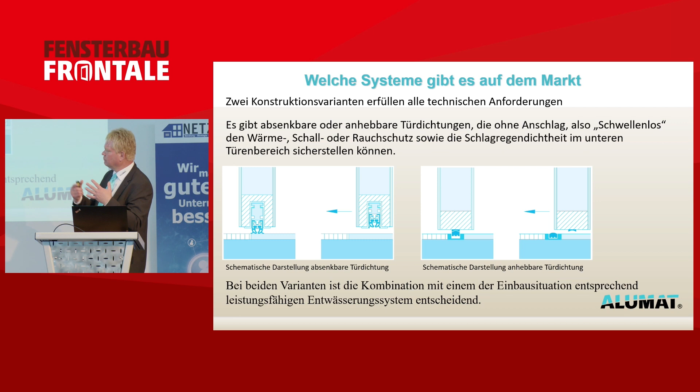So, accessible solutions: there are only two systems that are available here on the market. They differ slightly in their construction. We have the lowerable or liftable door seal. So they can ensure zero threshold, and they can at the same time ensure thermal, sound or smoke protection, as well as driving rain tightness. On the left-hand side, you can see the lowerable version. So this means a building element that is inserted into the door wing, and when the door is closed via a spring and push mechanism or pressure mechanism, it is pushed downward. So the door is opened, the sealing drives upward, the door is locked, the sealing via mechanical forces is pushed downward.

Or on the right-hand side, you have the liftable door seal. So those are magnetic seals, which work in principle like this. You have a magnet in the floor rail, and it has a corresponding counterpart, which you can see on the right-hand side. So if they are meeting in a parallel line, then they're drawn towards each other by magnetic forces, and this is how we seal off this air gap.

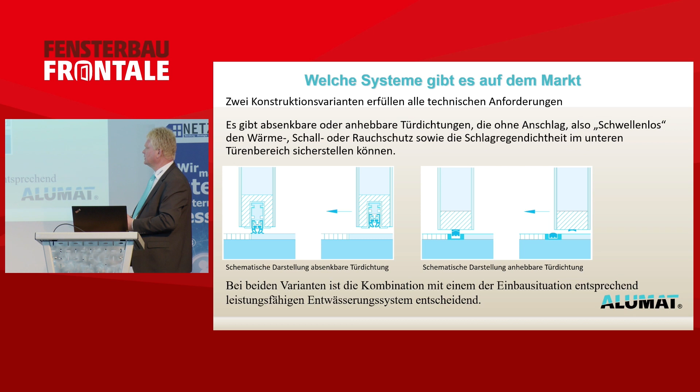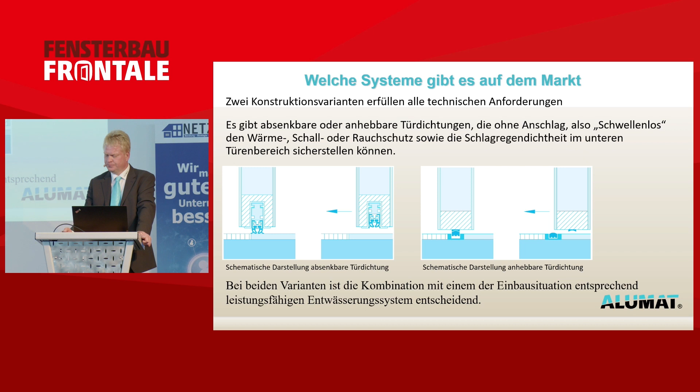With both versions, the combination of a high performance drainage system appropriate to the installation situation is necessary and should at least be investigated, because the sealing in and of itself in the long run will not guarantee success. So you always need to check for potential sources of water which ultimately are damaging, and how you can make sure that you have a watertight solution in general.

So how do we solve this with our solution? So in our floor rail, oh, I'm sorry, I pushed the wrong button. Here you can see it.

So you can see the working of the magnetic double sealing. So in the floor construction on the left-hand side, you have two magnetic strips installed, or magnetic profiles, which is why it's called magnetic double sealing. They are just loosely placed into the floor rail. So these magnets are activated when the door is closed. So the corresponding counterparts can be better seen on the right-hand side.

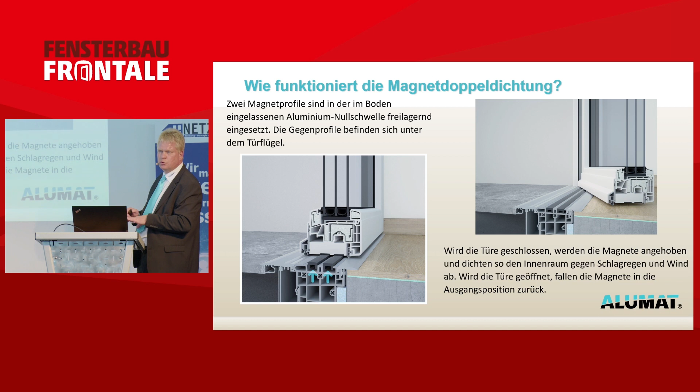So with every door at the bottom, you have magnetic strips that work as the counterpart to the magnet installed in the floor rail. And when the door is closed, as I already said, if both magnetic strips are in a parallel position, they are pulled towards each other upward. And this is how we seal off this system. So when we're opening the doors, relatively easy, the magnetic strips are moving back into the original position, and this once again gives us the accessible and barrier-free transition.

So level transition in construction can be realized via different solutions. For example, MFAT PH. So this is the German abbreviation for magnetic solution for the outer door, and PH stands for passive house certification. We will talk about that in a minute.

So the system is compatible with all wood aluminum systems, with all plastic profiles available on the market, with all aluminum door systems, and also with most of the steel door manufacturers and profiles. Sometimes we have the difficulty with a certain construction depth, so that we can actually insert the magnetic strip in the wing, because steel constructions keep it very lean, but usually in what is commercially available on the market, our solution works.

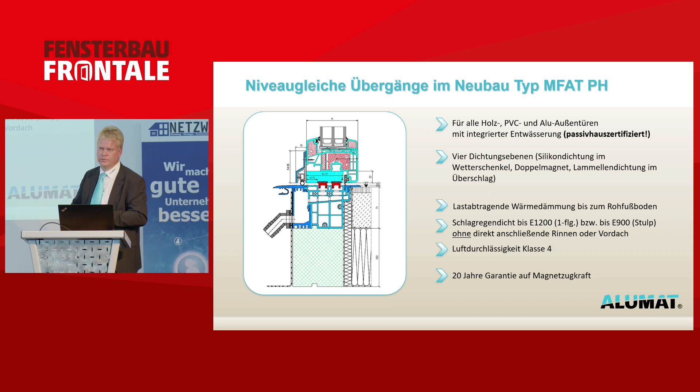So what are the individual parts? How is this realized? So as I already said, for the tightness against driving rain, we have the first construction characteristic on the outer side, which is the weather strip composed of several individual parts. I have the fundamental profile or ground profile, which is attached to the outer side of the door. Then we have the breathing seal, and then we have the cover for the blind, for clamping screws and the like. So this gives us the first hurdle of the rainwater.

So if the door is exposed to weather conditions, the water runs down the door, then it is transported outwardly via the weather strip. If you have a certain wind pressure, air pressure, then it can happen that in the folding area, the water is pushed via the wind pressure towards the inside. So this is where it then reaches the double magnet. So the magnets of themselves, they're just a sealed surface. If they pull together, nothing can get through.

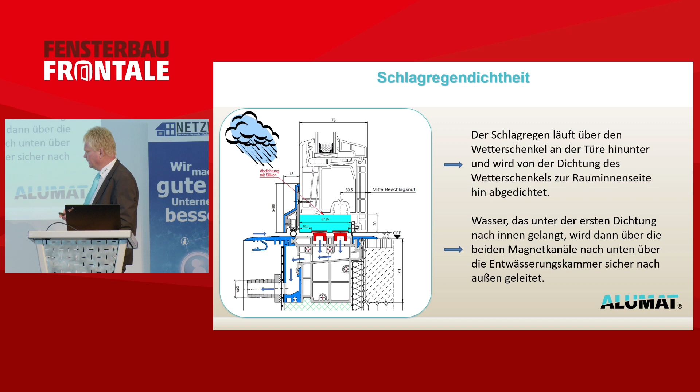But of course, there are some construction requirements. So things where you have ground contact, soil contact, you need to treat that differently than roof surfaces or balconies, of course. So you always have to assess on an individual basis, where do you have weather exposure, where can this water be directed to.

So what does this mean? This zero threshold solution that we offer, that has been on the market for quite some time, has proven itself, or stood the test of time, when it comes to water tightness. This water tightness is not simply a claim that we make, it is also certified by independent certification institutes. And here we have an example.

So we have a 2-wing door in connection with a DK plastic profile. We achieve best results here. So all the way to the class E900, we obtained certification. So we have different profile systems for wood, for plastic, for aluminum, for inner openings, for outer openings. So you have various certification documents that are all available on the website in a four-page leaflet. So there you get all the relevant information.

So it's not only about water tightness against driving rain, but all the other things that I will mention in a minute when it comes to sound, when it comes to protection against B&E, when it comes to other criteria. So now we're moving on to the heat transfer coefficient, always an issue when it comes to accessible doors. There you always have this problematic case of

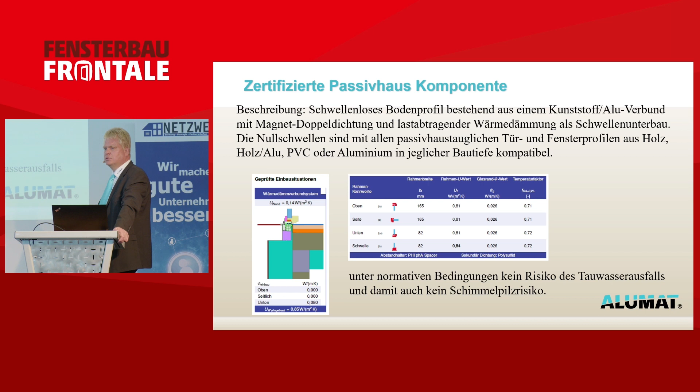So what does this mean? The contractor or the client must be informed prior to execution, and there is an obligation to inform and clarify. So with our threshold system, things are a little bit different. We in our F&E, again, luckily are one step ahead, so we did our homework here. So we have a passive house component, certified in that sense. So we have the first passive house certified zero threshold on the market worldwide.

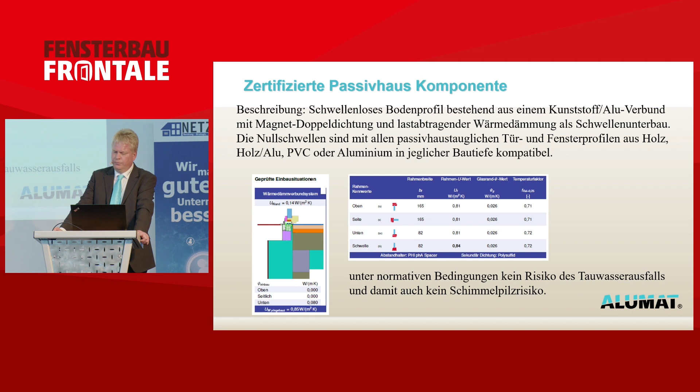So this means that our threshold-free floor profile consisting of a plastic aluminum composite with magnetic double seal and a load-bearing thermal insulation is realized as a threshold substructure. So the zero thresholds are compatible with all passive house compatible door and window profiles made of wood, aluminum, PVC, and the like. I already said that.

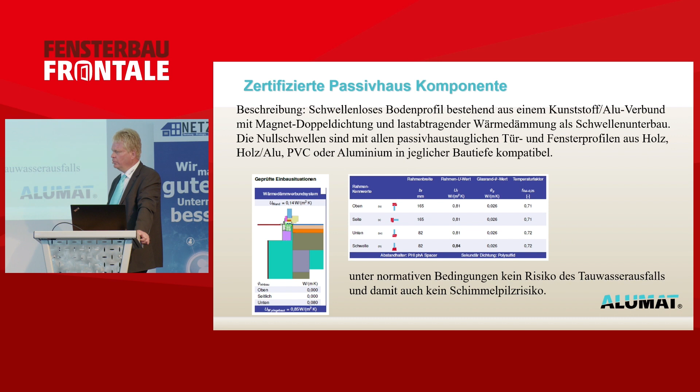So under normative conditions, we have no risk of condensation and therefore no risk of mold when it comes to construction. And in terms of planning, of course, this represents a huge asset because this prevents large scale insulation and the like.

So what about certificates? This is a very important market. Something that we encounter more and more is not only accessibility, but there are more requirements now that we need to live up to. So, for example, noise protection. And in terms of that, this means for our solution, MFAT for new buildings, but also renovation profiles called MFZ with our standard solution. Once again, we have a two magnetic door seal and we have a noise protection class of 43 decibel for joint sound reduction. And we can also, with a triple magnet, achieve 46 decibel.

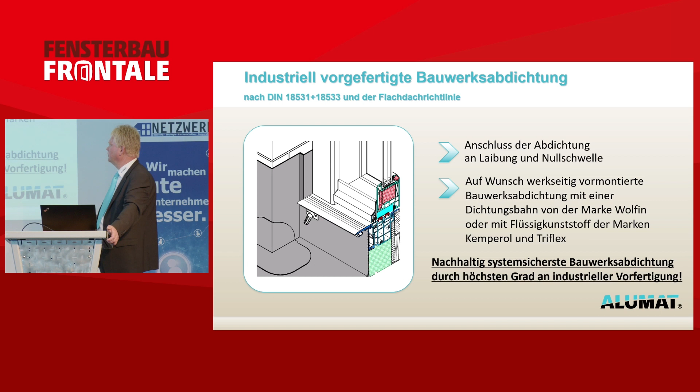Prevention of B&E, especially when you have two wing doors with wood and aluminum and plastics. We fulfilled this requirement with a Siegenia fitting of the class RC2. It might seem a little bit far-fetched, but it is actually doable. Another important point, everything that is barrier-free always needs to be particularly considered when it comes to sealing, waterproofing. We have an answer to that on our side. We have a sealing and waterproofing system that we offer. So on request, we can seal off with a PVC foil, but we are also in preparation for liquid plastics, for example, Kemperol or Triflex.

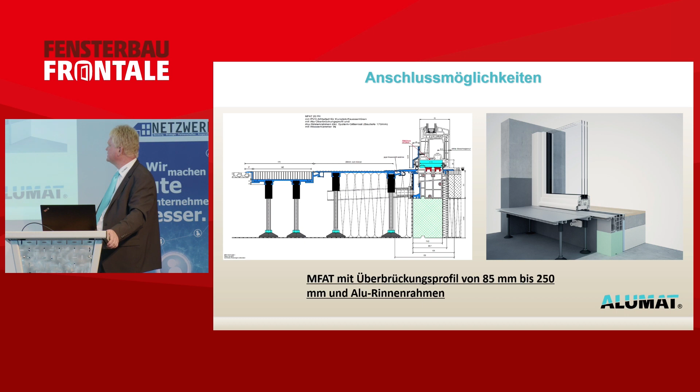Furthermore, via a certain interface, you can see that here on the outer corner. Here we have integrated an element where we can hang in additional profiles in the scroll nose. So for example, if you had to bridge a certain door rail or our own frame.

So we have great potential for innovation. We have a certain competitive edge in terms of legal obligations and liabilities, maintenance and comfort in terms of safety. As I said, we've been on the market for quite some time with the product. So we really developed the product so that it can be used in any situation, circumstances. Thank you very much.